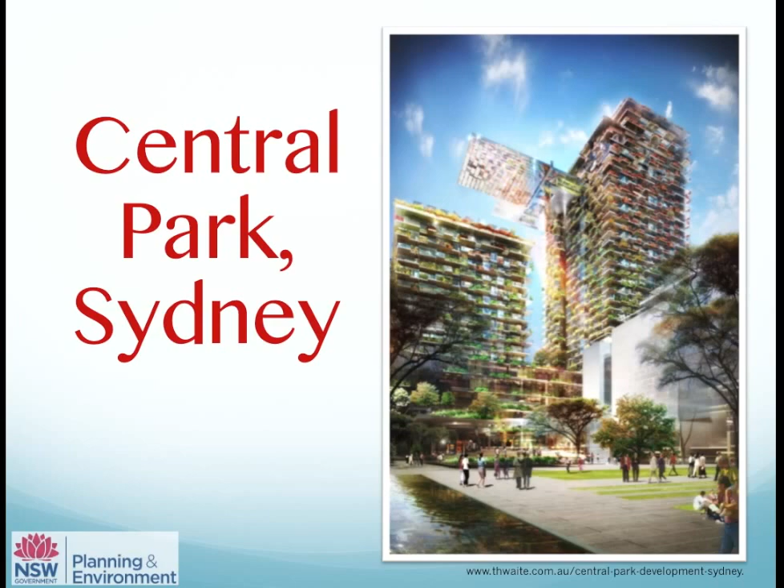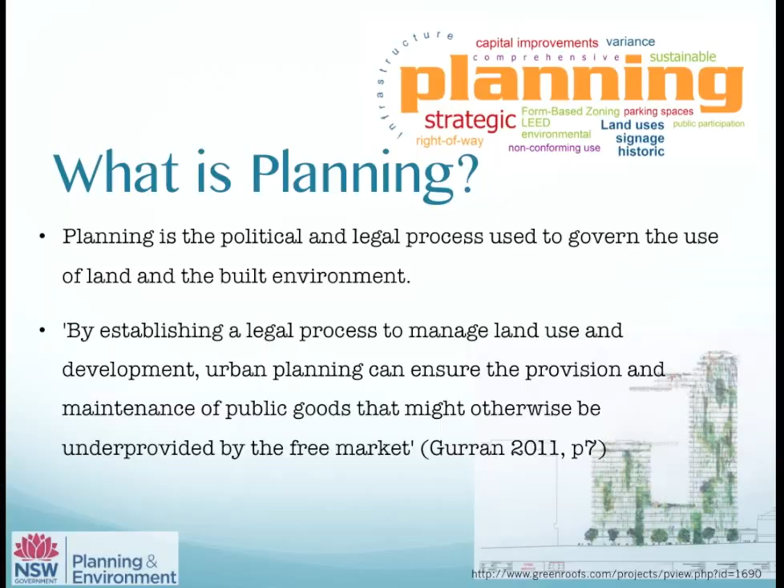Planning is a political and legal process used to govern the use of land and the built environment. It seeks to balance development with that which is in the public's interest. The EP&A Act is a cornerstone piece of legislation regulating planning and development in New South Wales. It provides for the creation of state environmental planning policies, local environmental plans and development control plans by which land and development is managed. Initiatives such as the Sustainable Sydney 2030 plan provide the vision that influences EPIs and shapes what a consent authority will consider to be in the public's interest.

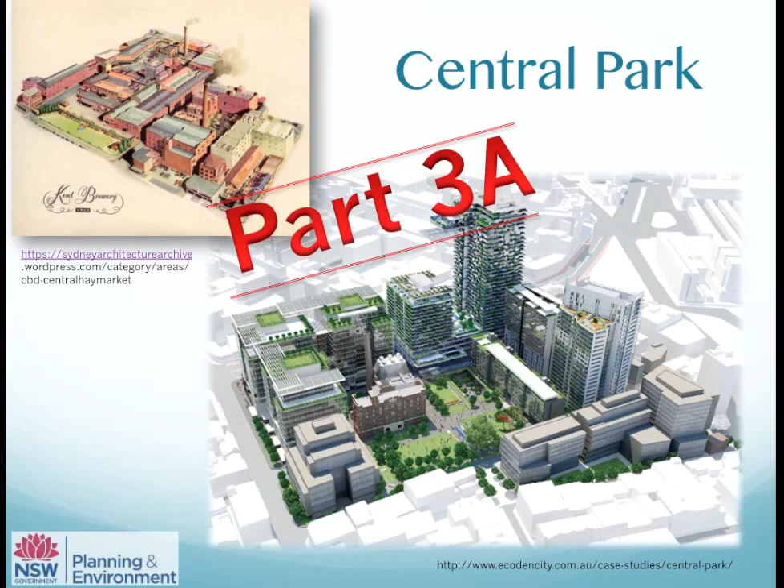The Central Park site is a 5.8 hectare site and is one of the largest urban renewal projects in the City of Sydney. The Minister for Planning, Frank Sartor, used his power under Part 3A of the EP&A Act to determine the planning matter on the site, declaring it a state significant site. This effectively took control of any significant approvals on the site away from the Council. Council would be consulted along with other statutory authorities and stakeholders, but its decision-making powers were removed.

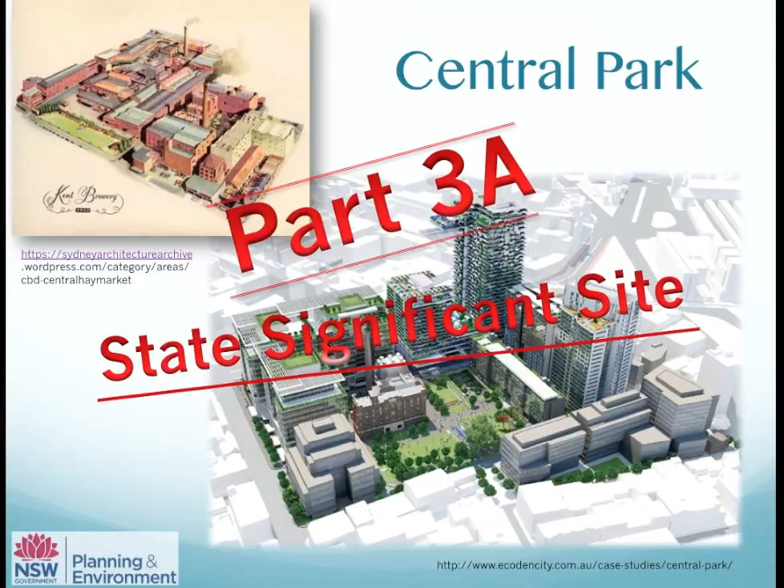In evaluating the proposed master plan, the Minister must consider all relevant EPIs and strategic plans. So how effectively did the New South Wales Department of Planning ensure that the development project upheld the framework of the EPIs, and could the process have been better improved?

Any prospective development must justify its proposal in the context of environmental sustainability. The EP&A Act and LEP generally, and the BASIX SEPP specifically, aim to regulate water and energy usage across the state and provide the framework for a sustainable future. The Central Park development has been developed within this framework.

It has a tri-generation plant which supplies on-site energy and a comprehensive water capture and recycle system which will reduce consumption. The exterior of the building is one of the most obvious signals that there is a distinct green edge to this development, with its towers wrapped in hydroponic vertical gardens.

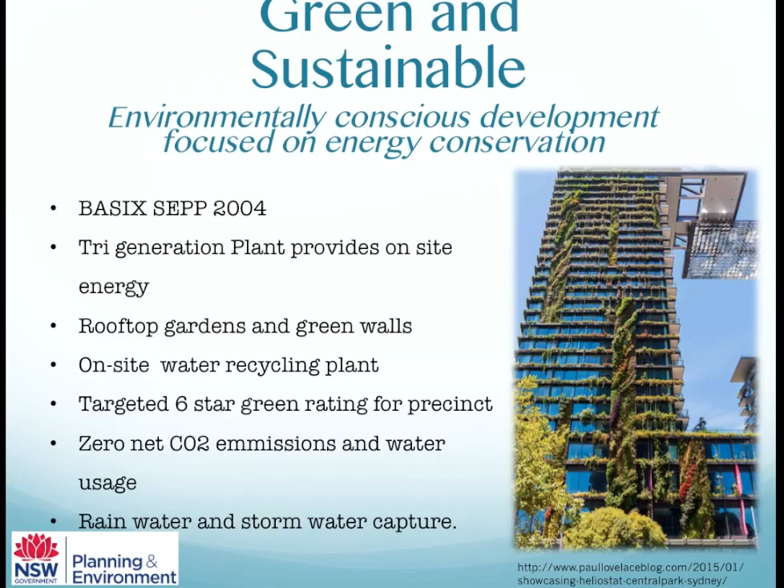Central Park has actively addressed the shortage of affordable student housing with the provision of 828 student dwellings across the site. Some feel this was not enough, considering the size and location of the site. However, given there was none there to begin with, the effect of this new accommodation still benefits the area.

Two VPAs were entered into over the site. VPAs are tied to title, so it creates certainty that all future landowners will have to abide by them. The first VPA involved a $32 million contribution to the Redfern Waterloo Authority for affordable housing. The second VPA involved community infrastructure, including a public park, public domain works, demolition, drainage and remediation, and road and pedestrian works.

Community concerns in regards to open spaces was addressed with a public space that is over 25% larger than in the initial concept plan, with a 4,000 square metre piazza adjoining it. The introduction of a cantilevered heliostat reduces overshadowing caused by its two towers, as it reflects natural light into areas which would have otherwise been overshadowed.

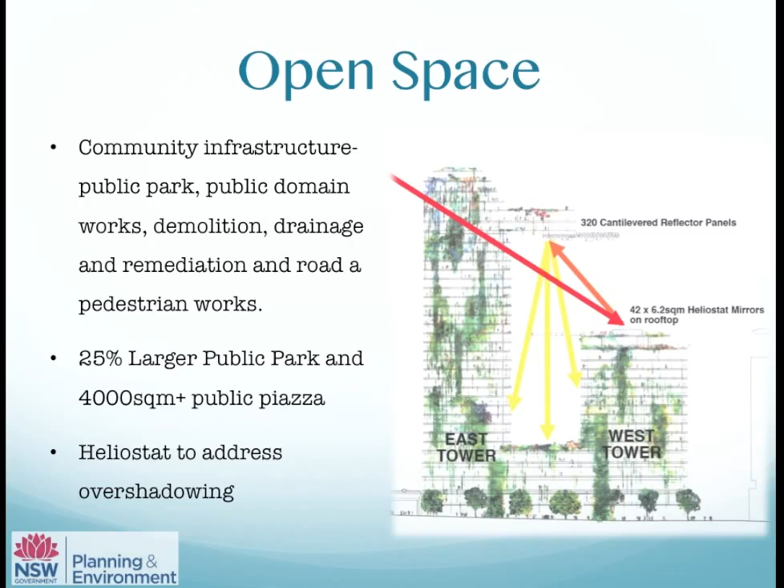Sustainable Sydney 2030 was adopted in 2007 after extensive consultation with the community. The plan sets goals to make Sydney green, global and connected. The development concept plan meets a number of these targets under this plan. The Sydney Metropolitan and Sydney 2030 vision focuses on the reduction of traffic congestion and increased use of cycleways and footpaths. It was imperative for the New South Wales Department of Planning to ensure that the development addressed these principles.

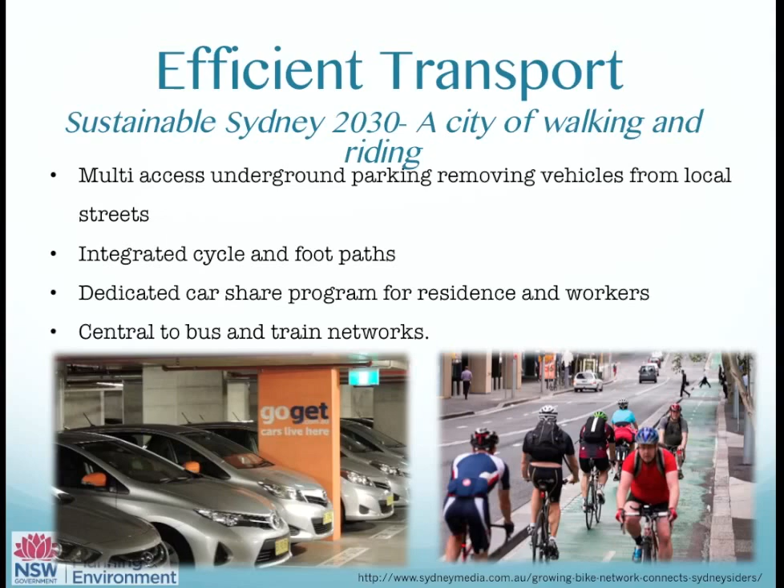The development addresses the need for providing integrated transport by providing 2,000 underground parking spaces with multiple entry and exit points. A dedicated car share program, GoGet, is also available for residents and workers, which should reduce the reliance on surplus vehicles. The development was designed to integrate pedestrian and cycle paths with Sydney's Cycleways program, thus providing multiple safe and healthy transport options for residents and minimising the carbon footprint.

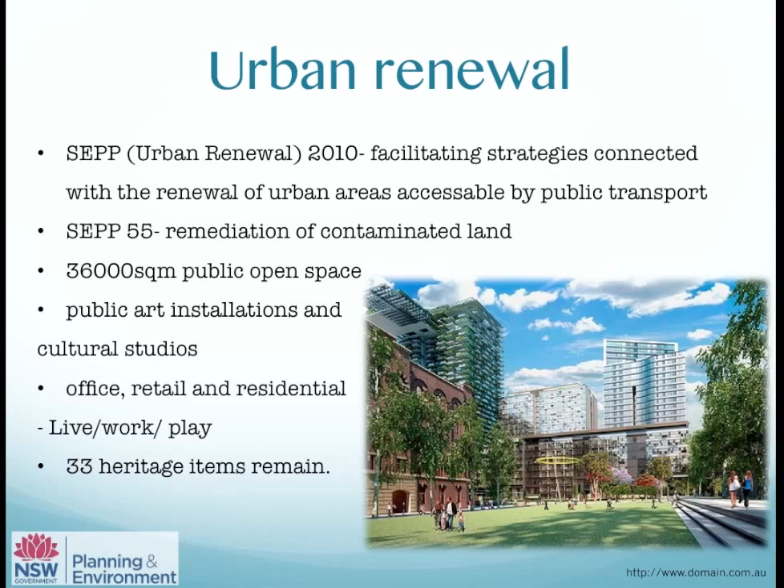Transformation of underutilised sites is an express goal of SEPP, LEP and Metro Planning instruments throughout New South Wales. By creating a mixed-use development inclusive of public open spaces, artworks, cultural studios and retail outlets, the development is renewing a formerly derelict site. SEPP 55 governed the project's extensive remediation work necessary in converting the site from its former industrial use to make the land habitable for occupation, and a large number of heritage items have also been retained.

Public consultation and collaborative design are essential in urban renewal for the protection of the public's interests. The New South Wales Department of Planning ensured that the community was consulted. We understand that the community felt that they were not as involved in the planning process as they would have liked to have been. The Environmental Assessment Report and State Significant Site Study were publicly exhibited for 32 days in 2006.

In retrospect, perhaps for a development project of such large scale, such period should be extended to at least 60 days to ensure that the public are fully aware of the project and have ample opportunity for their voices to be heard.

We also feel that if the collaboration eventually attained by the developers and several stakeholders in the community subsequent to the second design approval had been ascertained from the beginning, it would have streamlined the process and allowed for greater transparency in design, planning and development process from the start.

That being said, Frasers Property Group and Sekisui House continue to run community engagement events for the current and future stages of development, in addition to the statutory public exhibition project run by the Department of Planning and Environment and the City of Sydney. Online information is also readily available.

This process is a fine example of collaborative design. The final modified concept plan provides the model for innovative design and sets the new standards for desirable development and has in some ways shaped the Sydney 2030 vision for which all future major developments should aspire.

This project has been developed within the New South Wales Department of Planning's framework and has created a development that is beneficial to the city.